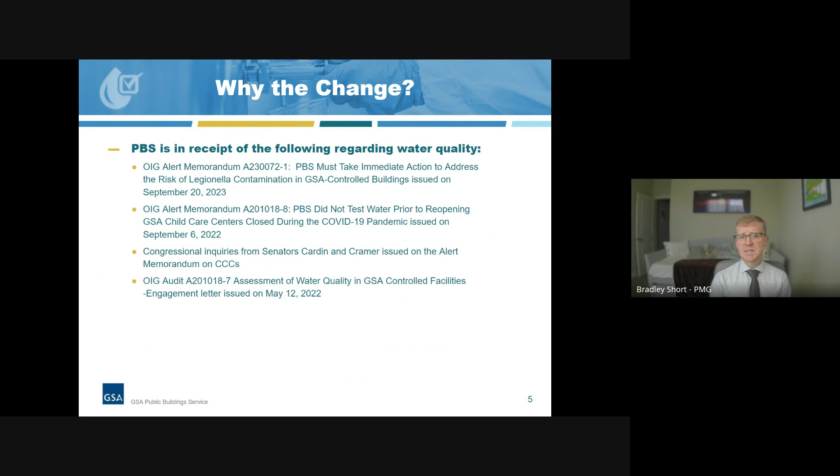This next slide shows the references to the various OIG documents that solidify the need for these changes. If you're interested in learning more, you can do a simple Google search of any one of those document control numbers, or you can go to the GSA OIG website for each one of these documents.

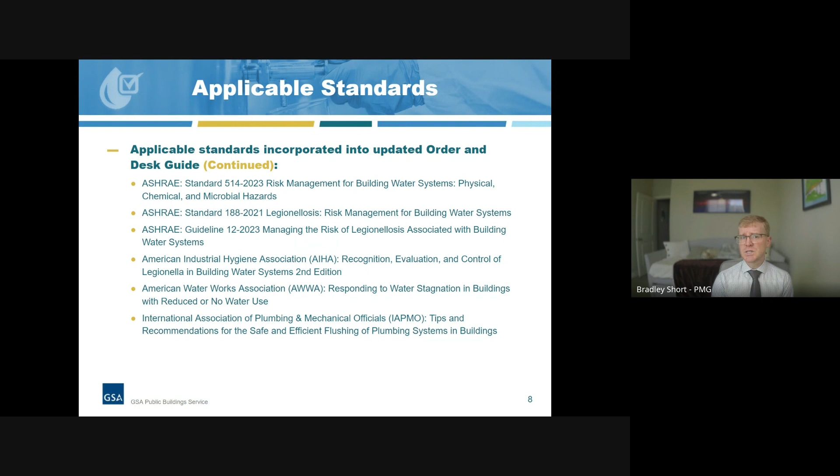Excuse me. So let's start by talking about where our water comes from. So a public water system plays a critical role in delivering safe drinking water to the public. It serves the vital function of supplying water for human consumption through pipes and other conveyances. And to be a public water system, it must have a minimum of 15 service connections or serve an average of 25 people for a minimum of 60 days each year.

The EPA has further categorized the public water system into 3 distinct types. So the first one we have is a community water system, which is kind of the most common and what we normally think of for a water system. And this consistently supplies water to the same population year round. The second type is a non-transient, non-community water system, which regularly provides water to people for a minimum of 6 months per year. And lastly, we have the transient non-community water system. And that serves places where people do not stay for extended periods of time.

Maybe think of like an RV park or something like this. And a public water system is responsible for continuously providing safe drinking water to the public that meets the EPA National Primary Drinking Water Regulations of the Safe Drinking Water Act.

Furthermore, and somewhat confusing here, is that a public water system can be publicly owned or privately owned. In very limited capacities, GSA owns and operates these different types of public water systems listed here. However, the vast majority of our facilities are provided by public entities. Your delegated facilities might also own and operate some of these types of water systems. So it's important to know what applies to your facility.

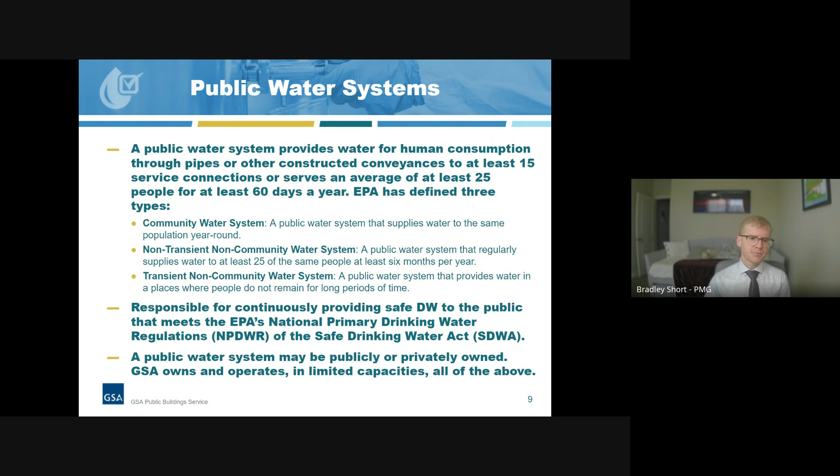On the other hand, there are also private water systems, such as private wells. These typically serve individual households or small groups of people and are not regulated under the EPA Safe Drinking Water Act. However, it's important to highlight that while the EPA sets federal drinking water regulations, individual states or local authorities can establish their own, more stringent drinking water regulations.

And unlike a public water system, private water systems are almost exclusively privately owned. GSA owns and operates several of these systems, mostly in remote land ports of entry, for example. Your delegated facilities could also own and operate a private water system. So again, it's important to know what your system is receiving its water from.

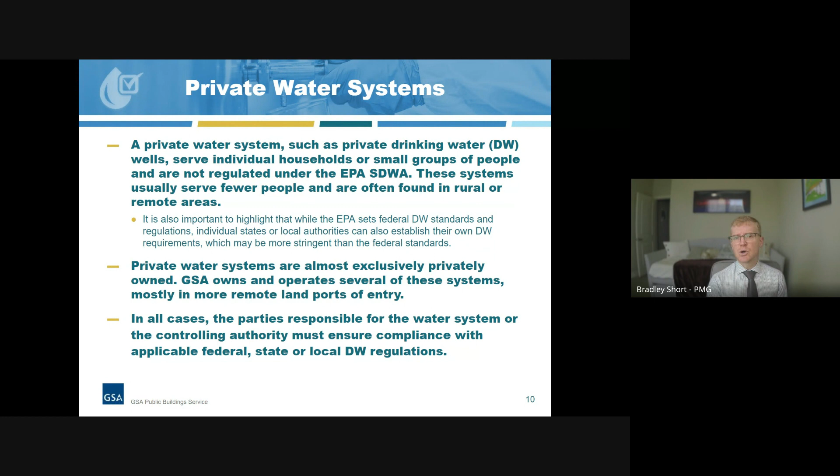So no matter if a building gets its water from a public or private water system, the parties responsible for the water system or the controlling authority for that facility must ensure compliance with applicable federal, state, or local drinking water regulations. So now let's move into our facilities, now that we've talked about where our water comes from.

So the quality of a facility's drinking water is influenced by a variety of different factors. It's not solely about the water source itself. Rather, it's a complex interplay of elements that shape the quality of the water that we rely on for consumption. One of the key factors is the design and condition of the building's plumbing system, the integrity of the pipes and infrastructure within the facility, which plays a pivotal role in maintaining that water quality.

And furthermore, the maintenance and operation practices, construction activities, and even occupant behaviors within a facility can all have a significant impact on water quality. In addition, we must also consider those issues related to that water system. Facilities often find themselves in a position where they have limited control over the water quality issues originating from the water system. Think of maybe like a boil order that you receive notification for.

Maybe even during these recent winter storms, you received something like that because the drinking water treatment plant couldn't control their treatment processes. So you get something in the mail or an email that says, hey, your building is under a boil order. That's the type of situation that we're talking about here. So in these situations, an agency's ability to act is contingent upon notification from those appropriate authorities.

The primary responsibility for ensuring safe and clean water lies with the public water system, which manages the entire water journey from the source through treatment and then all the way to distribution. However, when a federal facility receives water from a public water system that meets applicable standards, the torch is then passed to PBS, a lessor, or an agency with delegated O&M authority. Their role is to provide potable water at those point of use outlets.

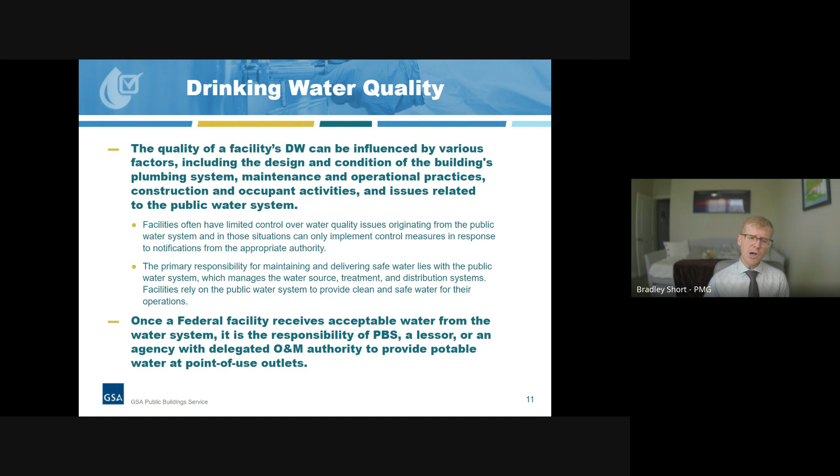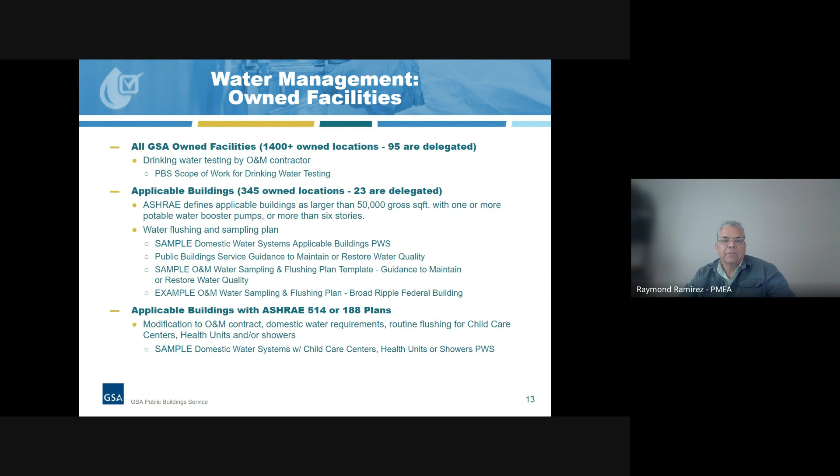Lastly, there are 13 delegated facilities that have already gone a step further and have implemented an ASHRAE 188 water management plan or an ASHRAE 514 water management program. In these instances, regions will share with the National Risk Management Office any building plans that they've developed. The National Risk Management Office will review these plans for current ASHRAE compliance. Agencies will ensure the plan is incorporated into the existing O&M contract and ensure it addresses the target areas, such as child care centers, health units, and showers. There are a variety of documents that will be associated with each of these actions and shared with registered attendees after the training. Next slide, please.

Additionally, there are 23 delegated focus buildings that have certain water features that will require weekly flushing activities in child care centers, health units, and building common and tenant shower areas. In these instances, contract modifications will still be required and sample statements of work for these are also provided.

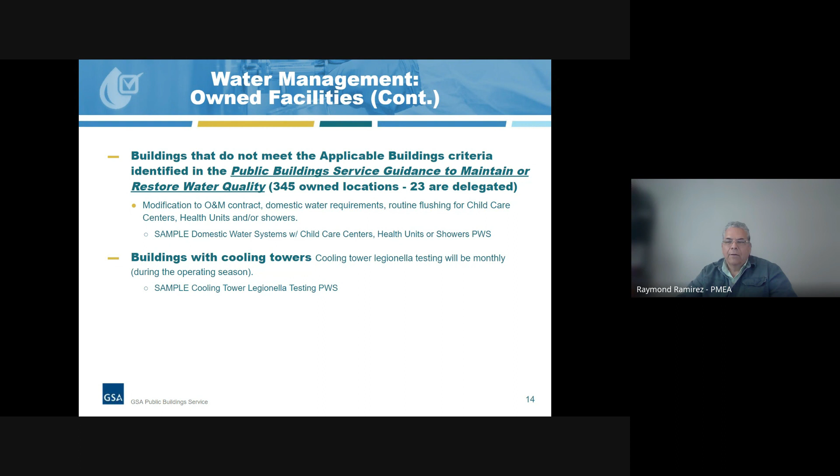Finally, facilities with cooling towers will require monthly legionella testing when in operation during those buildings' respective cooling seasons. Obviously, this requirement will somewhat differ on frequency based upon your geographic area and how long your cooling towers are in operation. Ultimately, though, if the tower is running in any given month, testing will be required. And like the rest, a sample statement of work for this action is also going to be provided. At this point, I'll turn it back over to Brad for details on all this stuff we just talked about.

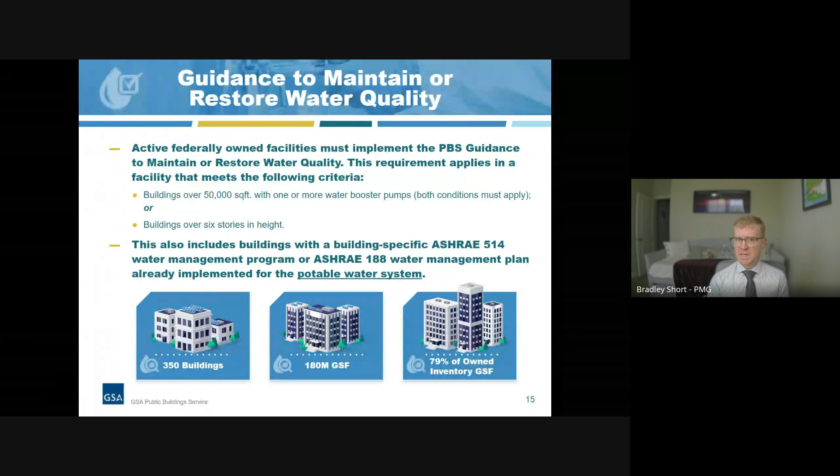Great. Thank you very much, Raymond. All right, now let's dive into the details of each one of those topics that Raymond introduced us to just a minute ago. We'll begin with the largest one, the PBS guidance to maintain or restore water quality, which again applies to buildings over 50,000 square feet with one or more booster pumps or buildings over 6 stories in height. And this comes from ASHRAE 514 that my coworker Courtney talked about at the beginning of the presentation. Please note that buildings that have already implemented an ASHRAE 188 or 514 water management program for the potable water system are exempt from this guidance, as those are kind of the gold standards in the industry.

An integral part of the guidance is for the O&M team to develop a water sampling and flushing plan that outlines all the building-specific details. Some key elements of the plan are confirmation that a workplace hazard assessment has been performed, information about the water system, including the disinfectant that's used and the target concentration range for the building, the maximum temperature allowed by regulation and code in your local area. These are typically between 120 and 124 degrees Fahrenheit.

The number of outlets in weekly flushing for focus areas, and a determination of the number of zones for the building based on two criteria: the number of main water lines and the number of hot water systems. So let's take a look at logistically how that's broken down.

So as outlined in the chart, if a facility has one main water line and one hot water system, the building would have two zones. If the building has one main water line and two hot water systems, it would have three zones. Similarly, if a building has two main water lines and two hot water systems, the building will have four zones. And this pattern continues similarly.

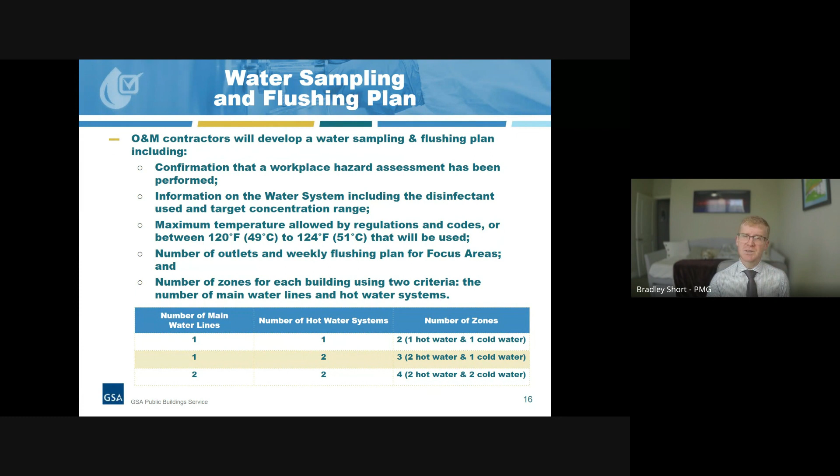Like Raymond was saying, certain areas of focus will require weekly flushing, with aerators requiring monthly cleaning or replacement if damaged. These areas are chosen based on the population they serve and their operational characteristics. They encompass health units, child care centers, and showers. Furthermore, where feasible and, if applicable, dead-end legs identified during routine maintenance should be flushed monthly.

The plan also has building equipment requirements. Hot water recirculation pumps should be run continuously. The circulating hot water should be maintained within the range that's identified in the plan. Sorry about that. That's typically between 120 and 124 degrees Fahrenheit. And then hot water tanks should be set at a minimum of 140 degrees before any down mixing occurs. Point of use water heaters should be maintained within the range that's identified in that plan. Again, between 120 and 124 degrees Fahrenheit.

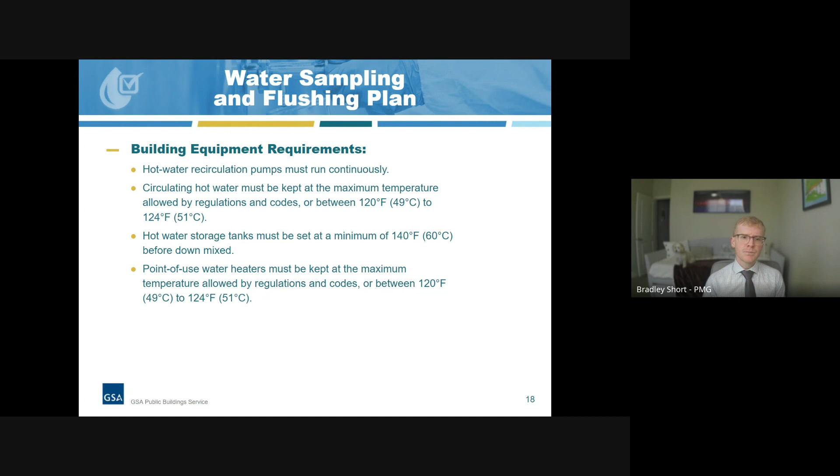So let's look at that sampling and flushing. It would start at the main water line and systematically progress outward through the potable water system, concluding at those furthest outlets. This is what's referred to as unidirectional flushing. Each water sampling event, at a minimum, should encompass the following: the water outlet nearest the main water line, an initial outlet within each designated zone, an outlet situated approximately in the middle of the run for each zone, and a furthest outlet within each zone.

Additionally, a random selection of additional outlets representing about 10% of the total, with a focus on areas that are presumed to be infrequently used, such as maybe a visiting judge's chamber, jury assembly rooms, or unoccupied areas. And if you don't have any of those, no big deal, just a random selection of 10% either way.

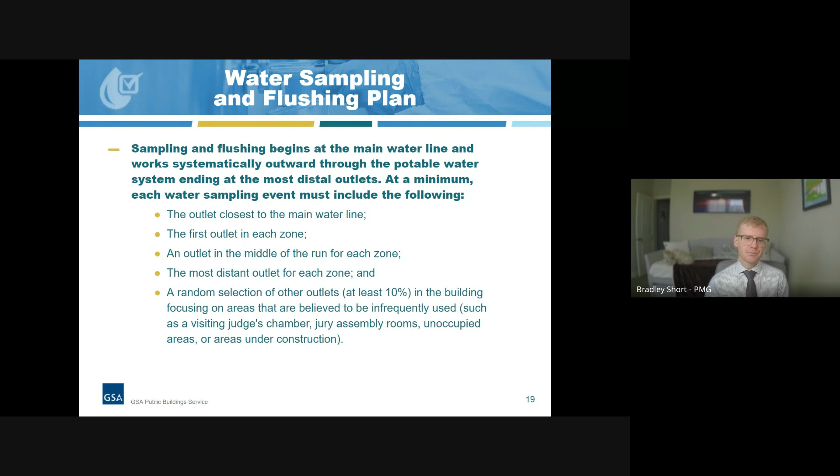Now that we've looked at the locations that will be checked, let's talk about how this will be completed on a monthly basis for cold water outlets. Prior to any flushing, the O&M contractor will measure disinfectant residual to determine if flushing is even required. The measurement of disinfectant residual varies depending on the water supply. For buildings supplied with chlorine, it's necessary to measure free chlorine, while for buildings supplied with chloramines, total chlorine should be measured. Field test methods approved by the EPA should be employed.

If an outlet registers an undetectable disinfectant residual, flushing is required until a detectable level is achieved. If there's a consistent reduction in disinfectant residual at those point of use outlets, the O&M should seek guidance from your agency's subject matter expert responsible for drinking water. Furthermore, if any outlets where no disinfectant residual can be detected, even after multiple rounds of flushing, the O&M should seek guidance from your agency's subject matter experts responsible for drinking water.

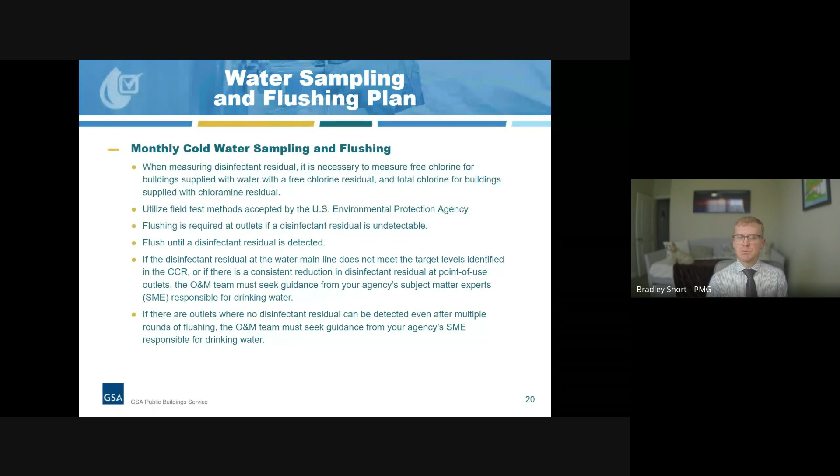Let's switch over to the hot water and look at what the monthly sampling and flushing plan looks like for this. So hot water is flushed at those same outlets as the cold water within each zone until it reaches its maximum temperature. The maximum hot water temperature is then measured using an instantaneous digital device, and that delivery temperature is adjusted to be maintained within the hot water limit that we identified in the plan. If you remember, this is typically between 120 and 124 degrees Fahrenheit.

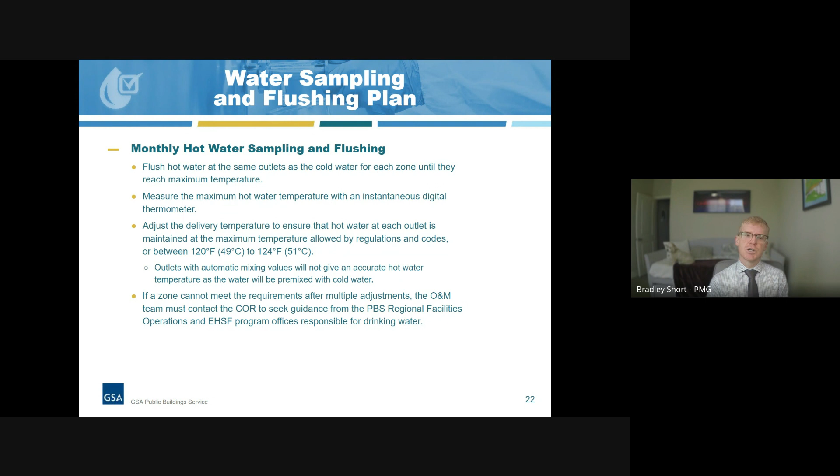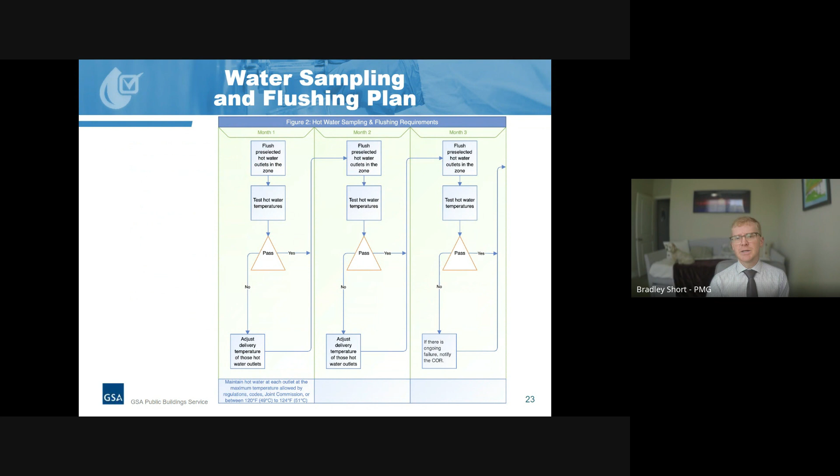It's important to note that outlets equipped with automatic mixing valves will not provide an accurate reading of hot water temperature, as the water is pre-mixed with cold water. If a zone is unable to meet the temperature requirements even after multiple adjustments, it becomes the responsibility of the O&M team to contact the agency's SME responsible for drinking water. Similar to cold water, here is a visual representation or a flow chart for the process that we just discussed for hot water. Again, included in the guidance, so don't feel like you need to go through it all at this moment.

To streamline and standardize the creation of the water sampling and flushing plans by the O&M contractors, OFM created a sample water sampling and flushing plan template, along with a completed example for a fictional building based on that template. This resource is designed to assist in the development of these plans and allow for consistency across the regions. The finalized plan is to be submitted to GSA email account using a specific naming convention.

And if a building already has, or you guys choose to develop an ASHRAE 188 or a 514 water management program instead of using this template, that's completely fine. Please just submit it to the GSA email account as well, so we could have this in our records that it has been completed. And then all recurring information should be recorded in your agency's computerized maintenance management system, or CMMS for short.

Okay, let's move on from this guidance. I feel like we've talked enough about this one. And let's expand to talk about our larger inventory and some additional steps that our agency is taking. One of the main ways that we stay informed about the water quality from the public water system is what's called a Consumer Confidence Report, or a CCR for short.

And the EPA requires that community water systems make that CCR publicly available or send it to their customers each year by July 1st. The O&M contractors for all federally owned facilities served by a community water system must review these reports annually, and if any issues are noted, provide notification to the agency's SME and document it in the agency's CMMS.

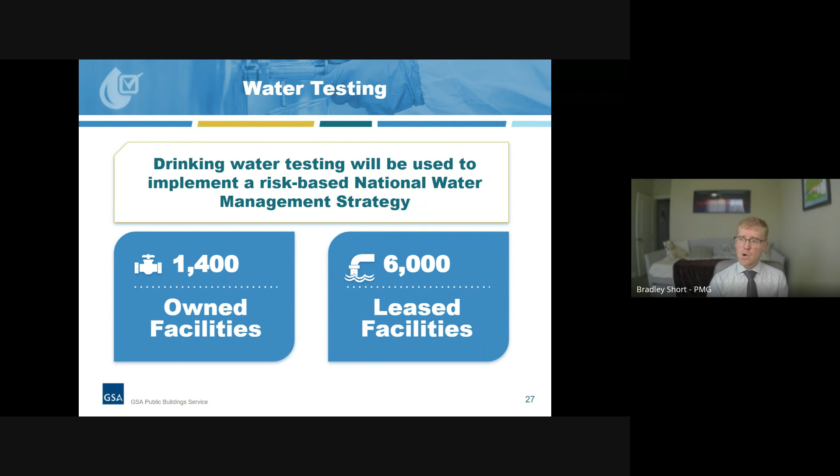Another major component of the GSA National Water Management Strategy is to conduct baseline testing in FY24 in both owned and leased facilities. This will include approximately 1,400 owned facilities and 6,000 leased spaces. An initial drinking water test will be performed in all currently active and occupied federally owned facilities exceeding 1,000 square feet that have drinking water systems.

And this entails testing a minimum of 10% of water outlets designed primarily for human consumption, which would include our drinking fountains, our bottle fillers, our kitchenette faucets, things like that, for the presence of Legionella, lead, copper, and total coliform, including E. coli.

Additionally, a representative number of water outlets must be subjected to Legionella testing, and this would encompass various points within that hot water system or cold water system, such as the incoming service line, the water storage tanks, expansion tanks, hot water recirc circuits, and common and private tenant showers. The test results surpassing federal, state, or local thresholds will necessitate remedial action.

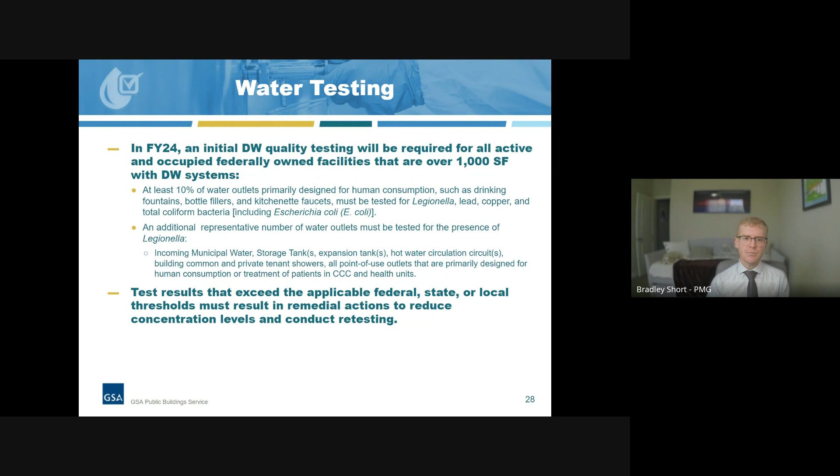So during routine or reactive testing, PBS follows the most stringent state or local thresholds, and in the absence of such standards, the EPA National Primary Drinking Water Regulations are used. Specifically for lead, the threshold is 15 parts per billion, while for copper, it's 1,300 parts per billion. Total coliform and E. coli are reported as either present or absent, with the presence indicating a potential issue.

For Legionella, it's not as cut and dry, unfortunately, but PBS adheres to the CDC guidance for routine testing of Legionella. This guidance considers several factors, including concentration measured in something called colony-forming units per milliliter. For potable water used for drinking, well-controlled conditions show detectable levels up to 0.9, while poorly controlled conditions range from 1 to 9.9, and uncontrolled conditions exceed 10.

Non-potable water used in mechanical systems follows a similar pattern. Well-controlled conditions show detectable levels up to 9, poorly controlled from 10 to 99, and uncontrolled exceeding 100. To add a little complexity, the extent of colonization, the type of Legionella bacteria, and changes in concentration are also taken into consideration when determining if the system falls into well-controlled, poorly controlled, or uncontrolled.

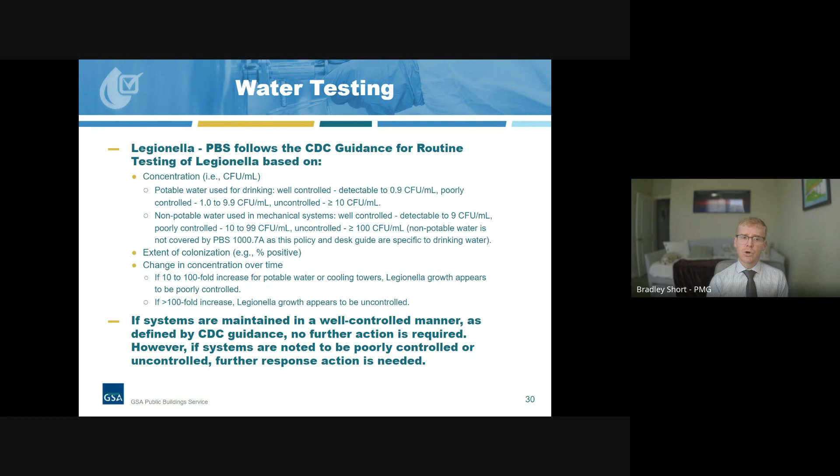Systems in well-controlled conditions require no further action, but poorly controlled or uncontrolled systems necessitate additional responses. And similar to the plans, the final drinking water testing report will be attached to the agency's CMMS and also sent to the GSA email address using a specific naming convention.

Moving on to one more different topic before passing it back to Raymond, let's talk about the facilities that do not qualify for the implementation of the PBS guidance to maintain and restore water quality. So if you have facilities that are smaller than the requirements established in that guidance, there are still certain areas of the facility that will demand regular attention.

And these areas would require weekly flushing, with aerators requiring monthly cleaning or replacement if damaged. And the selection of these areas is determined by the population they serve or their operational characteristics, encompassing health units, childcare centers, and showers. The notable difference here is that there's no mandatory plan that's required, and other building areas outside of these spaces do not require additional sampling or flushing.

At this time, I'll pass the floor back to Raymond to delve into some of the non-potable elements, which, while not explicitly covered in the GSA order on drinking water, are an integral component of our overarching water management strategy.

Thank you, Brad. This next slide is really to reiterate the expected requirement for non-potable water systems, essentially those building systems that are left open to the elements. And again, as was mentioned before, any facility with a cooling tower will be required to be tested on a monthly basis when it's in operation. The test will be Legionella specific and not simply based on a total bacteria count.

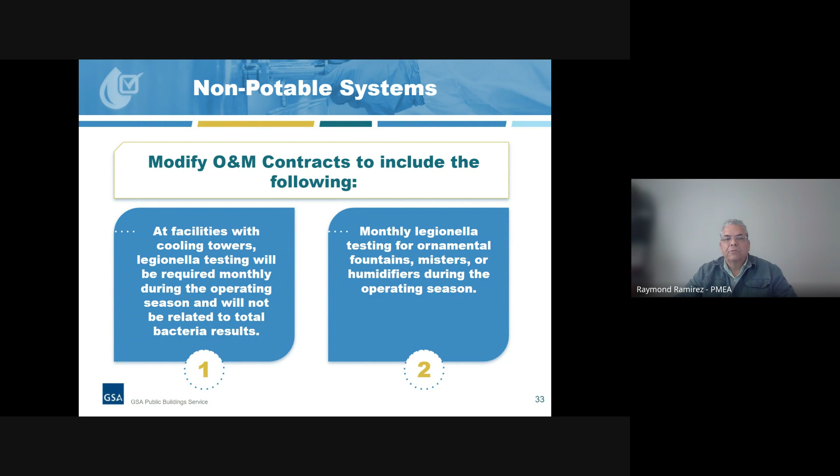Similarly, monthly Legionella testing will also be required for ornamental fountains or water features that release aerosols in the buildings or on site during their operating season. Additional water feature examples can be misters or humidifiers if they exist at your facilities. Humidifiers or misters that use steam need not be tested.

We talked about the requirements for non-potable systems and a little bit on the money to be spent. And now I'll turn it back over to Brad, who just had 10 seconds to catch his breath, who will get into a few more specifics on building schedules and details.

Take it away, Brad. Thanks, Raymond. I appreciate the break. Gave me an opportunity to grab a drink.

So yeah, I'm gonna jump back in here for childcare centers. So there are a few specific requirements, and the first one we've already talked about before, but based on the unique population that these centers serve, there are some additional things that we take into consideration for these types of centers. So weekly flushing and monthly aerator maintenance are going to be standard practice. Again, we talked about that in a few slides previously.

But then in all open childcare centers, annual testing for lead and copper must be conducted on all outlets used for drinking and washing. And this is established a lot of times in their licensing agreement as well. And most states have also moved to yearly testing. So it's something that we used to have an every 3-year process, and now we move to an annual requirement.

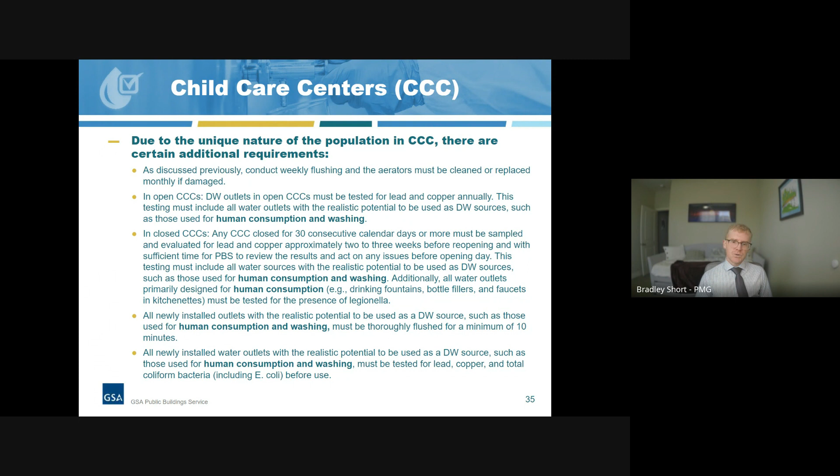So moving to our larger inventory, post-installation water testing is also a mandatory procedure when specific aspects of the water system are impacted by repair or renovation projects. Again, as we talked about in the beginning of the presentation, construction activities can be one of the biggest things that impact water quality. And in the previous policy, this was referred to as water commissioning, and it referred people to the P100. However, the P100 didn't have a lot of information on specifics of what to do.

So a team of IHs tried to have some logistical items that we could put in here that align with some industry standards. So newly installed outlets designed for drinking must be tested for lead, copper, and total coliform before use. In the case of a building replacing building service lines or primary pipes, compliance with applicable plumbing code disinfection requirements is critical, along with adequate downstream flushing of the work.

Furthermore, a representative sampling of outlets connected to the new system must be tested for lead, copper, and total coliform before use. When addressing lead service line replacement, water systems must adhere to the EPA's lead and copper rule. And this involves notifying customers and providing appropriate response measures such as pitchers or point of use filters.

And this option is also followed up by them extending offers to do testing within our facilities free of charge. They don't have to actually do the testing, but they have to offer the testing to their clients. And the expectation would be that we would take them up on this opportunity and get the free testing to ensure that the work that that public water system is doing is not impacting our facility.

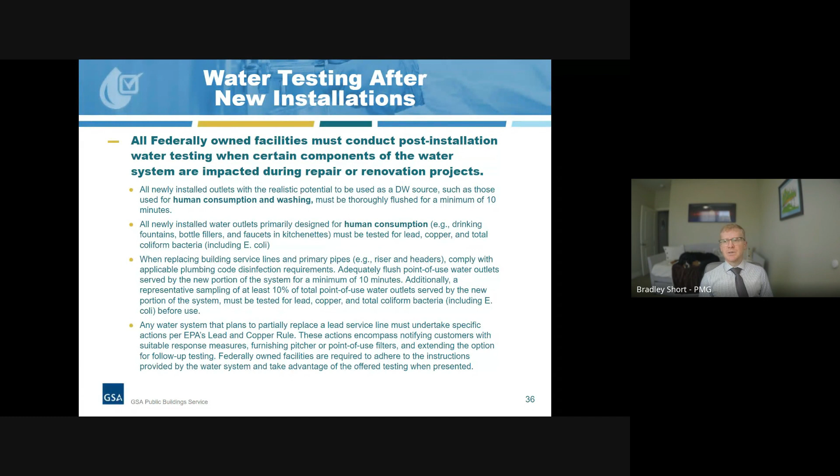This is actually pretty common in a lot of big cities these days, especially with what's happened in the last 10 or 15 years with several cities in the United States having big increases in lead concentrations coming to the community. So a lot of facilities are looking at their entire inventory of lead service lines and prioritizing the removal and replacement of these. So you might see more and more popping up, especially if you're in a lot of these bigger cities. So our federally owned facilities are required to follow the water system's instruction and utilize any offered testing as needed.

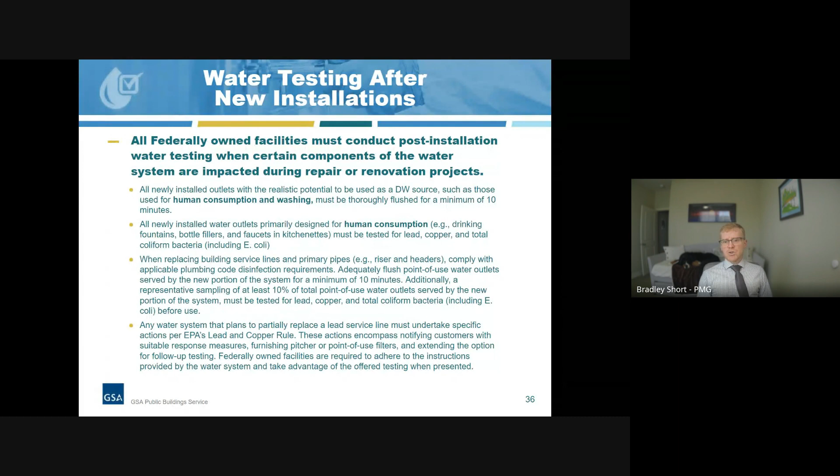And then finally, in response to incidents, complaints, or emergencies related to drinking water, the delegated agency must promptly investigate these concerns for those facilities that you're managing. And that investigation process entails efforts to identify the nature and source of the suspected drinking water issue, potentially involving follow-up testing. And if the investigation identifies the presence of a drinking water issue, corrective actions are promptly initiated to address and remediate the source of the problem.

And then when you do have a problem, obviously follow-up testing is then conducted to verify the effectiveness of these control measures. To determine whether additional testing is needed beyond that initial area of concern, the agency's SME responsible for drinking water would exercise their professional judgment in this area. And then any drinking water incidents, complaints, or emergencies reported through the O&M contractor or the facility manager are to be documented and stored in the CMMS for record-keeping purposes.